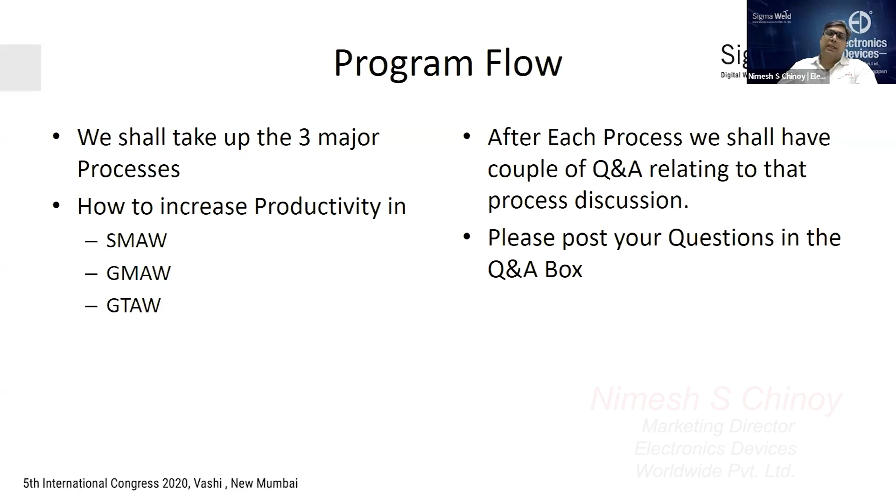Traditionally, the construction sector, when you look at it from the welding point of view, we are considering a lot of pre-engineered buildings and the technology is getting more and more modular, which means aluminum foam formwork, a lot of pre-engineered structures which are prefabricated in the shop, taken on site and quickly erected. Typically, arc welding, MIG welding is what is used for these applications by and large.

We will discuss how we can adapt to the newer technologies and migrate to the next process, and how it will help in terms of productivity.

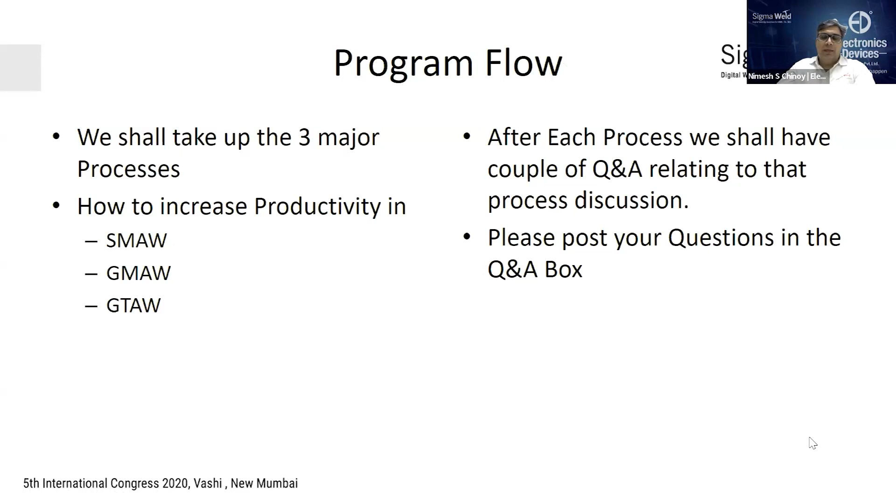Here's a small chart which shows a comparison between deposit rates for arc welding, which is at the bottom, about 400 grams to 5.5 kgs per hour. Then you have MIG-MAG, which is at 600 grams to a max of about 12 kgs. Then you have flux core, which is about 1 kg per hour to a range of about 15. And single wire submerged arc, which starts from 3 kgs per hour and can go up to 16 kgs per hour. Of course, there are variants in submerged arc which can take it further higher.

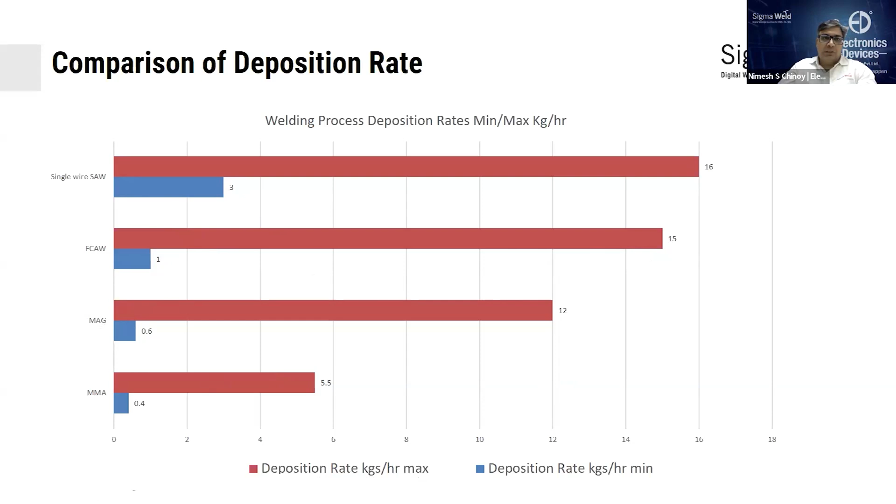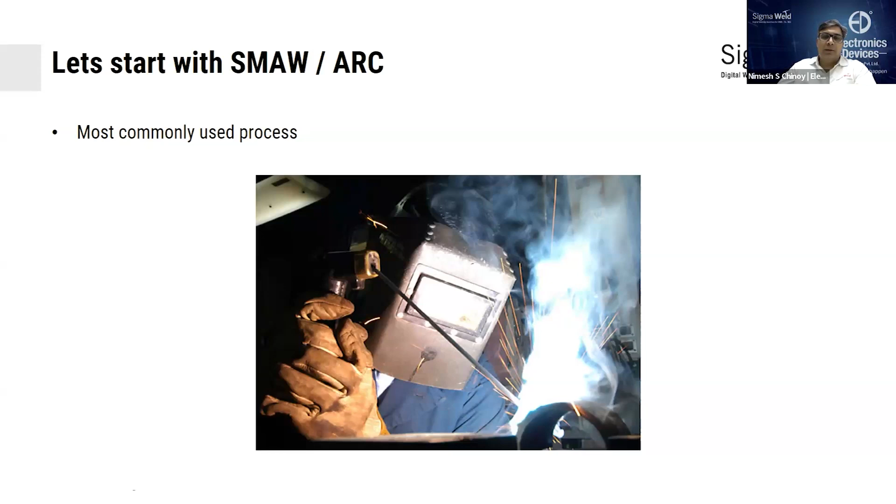But for the sake of our discussion, this will be good enough. Most commonly used process is arc welding, or SMAW. You would have seen this image at almost all sites. This is called arc welding, where an equipment is used along with an electrode to strike an arc. This process is man-dependent and usually cannot be automated.

Since the process is welder dependent, you need to remove the slag after each run of welding - chipping. There's a lot of spatter involved, which means grinding post welding as well. Of course, at the end of each consumable - that is a length of 300 millimeters, or maximum 1 meter in cases of shipyards - you need to change the consumable. There's a changeover time and a stub end loss, that is, the end part which the welder would not be able to fuse simply because it will be too hot. So that's something called a stub end loss which occurs.

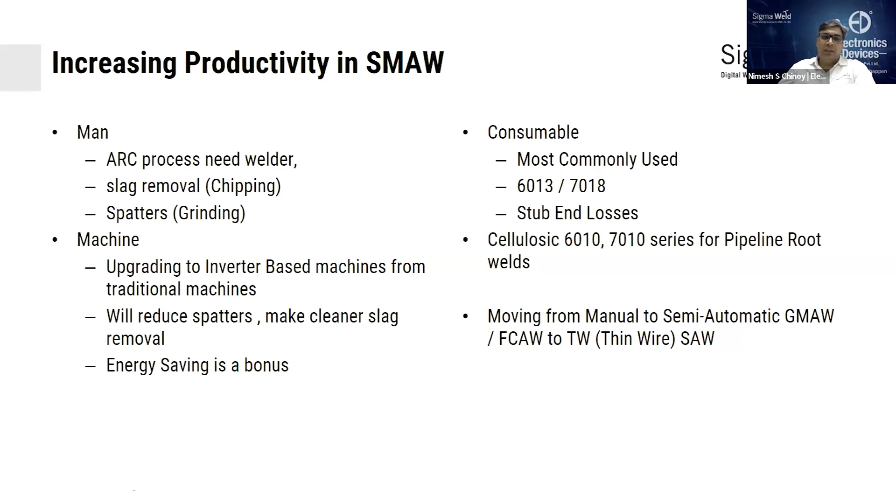How do you now migrate from this, or increase productivity in a process such as this? First, we can upgrade to inverter-based power sources from traditional transformer and thyristor power sources. This will help reduce spatter, make cleaner slag, and also help you save on energy. That means your energy cost goes down drastically.

When we move from arc welding to MIG or flux core welding, you can see the kind of productivity increase we can get. These are electrode types. If you look at 7018 welded in uphill position, you will get a deposit of about 0.65, that is 650 grams per hour. If you look at 6010 cellulosic electrode and downhill, 1 kg per hour. Then you look at low hydrogen deposit, 1.18.

The minute you start moving into flux core arc welding, you get 1.62. Move into semi-automatic flux core arc welding, that gives you about 1.78. If you mechanize it, that means put this onto a trolley - we will see all that later - you can get a deposit of about 2.43 kgs. And if you completely automate GMAW, that is gas metal arc welding, deposits can be as high as 4.41. And with dual torch or dual wire, we can reach up to 7.5 kgs per hour. So moving right from 0.65 to 7.5 is possible.

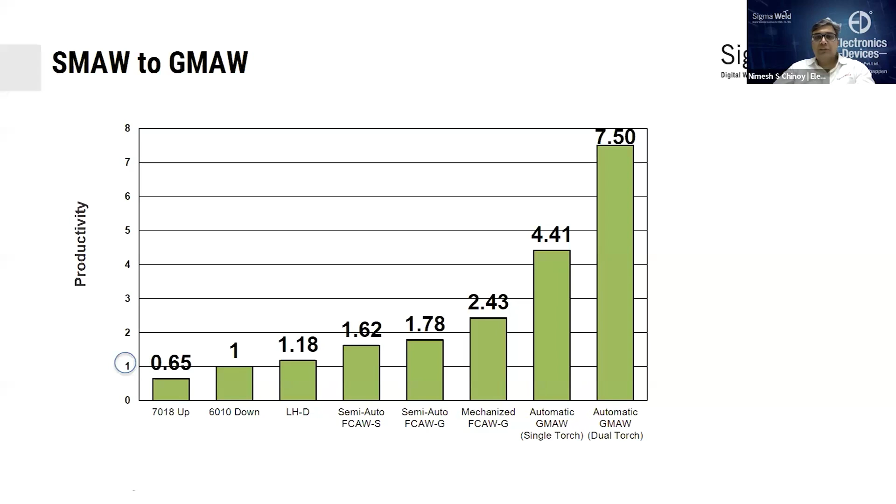Now, if you look at the advantages of moving from arc to flux core or GMAW - arc is a manual process, low investment cost, metal recovery is low. That means per kg of electrodes that you buy, your deposit rate is lesser. Stub end losses are high, no gas is required, which is a plus point. High speed in root passes is possible because you get higher mass deposited per square millimeter.

When you look at flux core arc welding, it can be manual or mechanized. Investment is higher compared to arc welding in terms of the capital cost of the power source. So a typical 400 ampere arc welding power source will cost you about 40,000. A typical flux core arc welding power source would cost you about 80,000. So initial investment is higher, but the metal recovery is even higher.

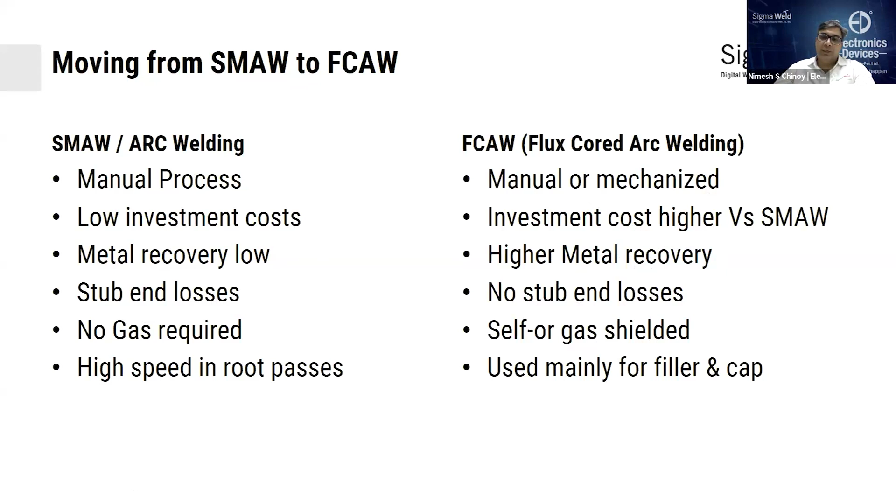So per kg that you spend, you recover more. Metal is deposited onto the job with no stub end losses. They come in 15 kg spools, and it can be self-shielded or gas shielded. It's mainly used for fill-up and capping runs, not for root runs.

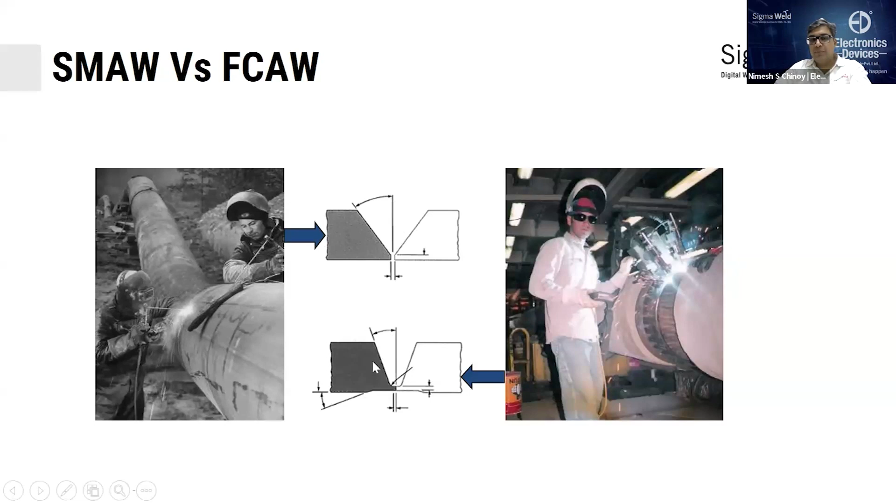However, if you mechanize it, that is, put it onto a trolley or an orbital track, you can reduce the gap, thereby putting lesser amount of material on it and having higher productivity. So this is what can be easily achieved.

Training of welder, you need to do if you want to move from arc to MIG, the same welder needs to be retrained. Basic MIG welding power source will be required. If you're doing FCAW or GMAW, you may need gas such as argon, CO2, or a mixture of argon and CO2. Semi-automatic, that means you can use tractor, trolleys, things like that. It can be easily automated. You can use single or twin torch per process.

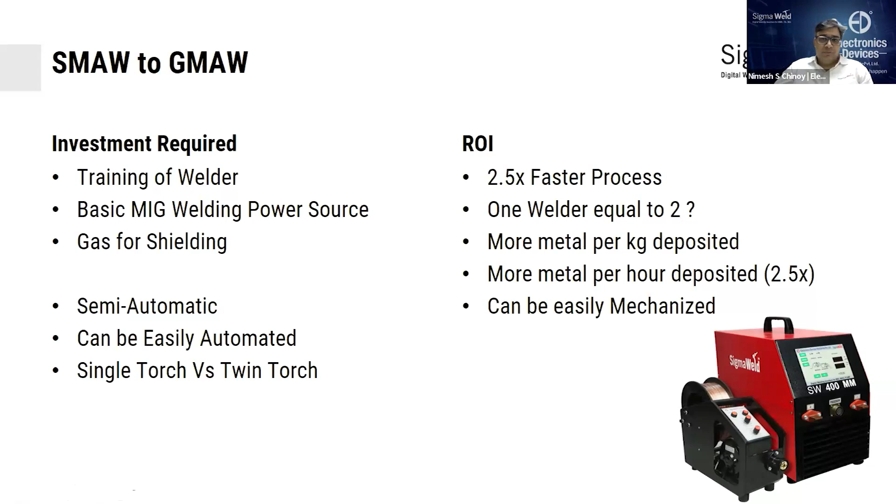What's the return on investment? If you move from arc to MIG, you can have 2.5 times faster process, so more productivity. One welder in place of 2 or 2.5, more metal per kg deposited, more metal per hour deposited, and you can easily mechanize the system.

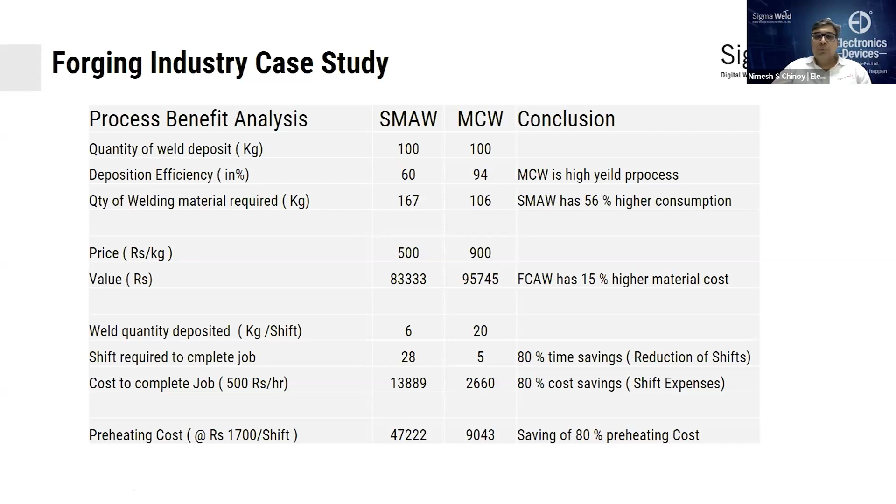For the forging industry, this was one of the case studies done. For every quantity of 100 kgs deposit, efficiency of shielded metal arc is only 60%, whereas metal cored wires was 94%. That means if you bought 100 kgs to deposit 60 kgs, you would only put in 60 kgs. Whereas in metal cored, if you bought 100 kgs, you would put in 94 kgs onto the job. So if you look at the saving on preheating costs, it's almost 80%, 80% saving on timing and 80% saving on costs. So it makes a lot of sense to move into the newer processes as soon as possible.

Industries where these are possible too: structural welding, prefab, pre-engineered fabrication, pipe to flange welding, forging repairs, and hard-facing applications.

Let me quickly take you to another process from which we can migrate from arc welding to thin wire submerged arc. Thin wire submerged arc makes a process possible for using between 5 to 15 millimeter thick plates. It uses smaller power sources like 600 amps, welds with solid wires of 1.2, 1.6, and 2 mm, and speeds are more than 7.5 times that of arc welding.

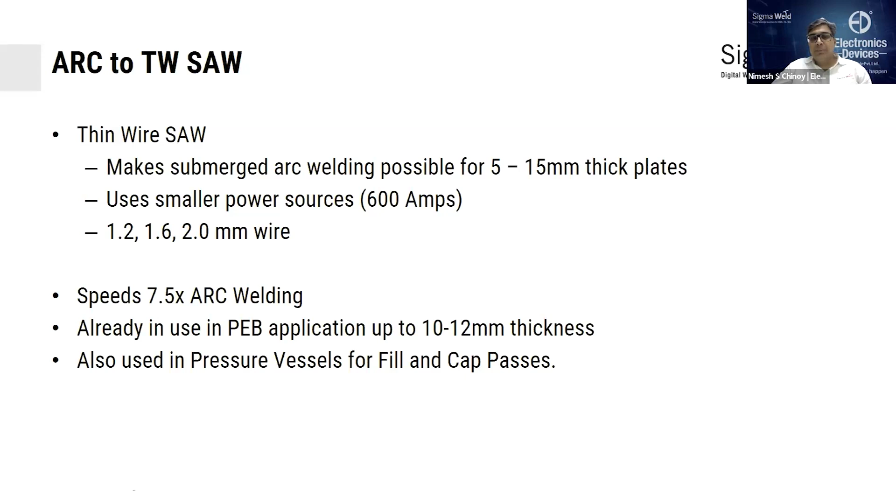It's already a standard usage in the PEB industry up to 10 to 12 mm thickness, and also for pressure vessels for fill and cap passes. Here's an example where a 5 or 6 mm thick vessel is being fabricated using thin wire SAW. This is a 1.2 mm wire, and the productivity is going up 7.5 times. Not to mention, when you use the submerged arc process, the weld quality also improves, and the deposit also improves.

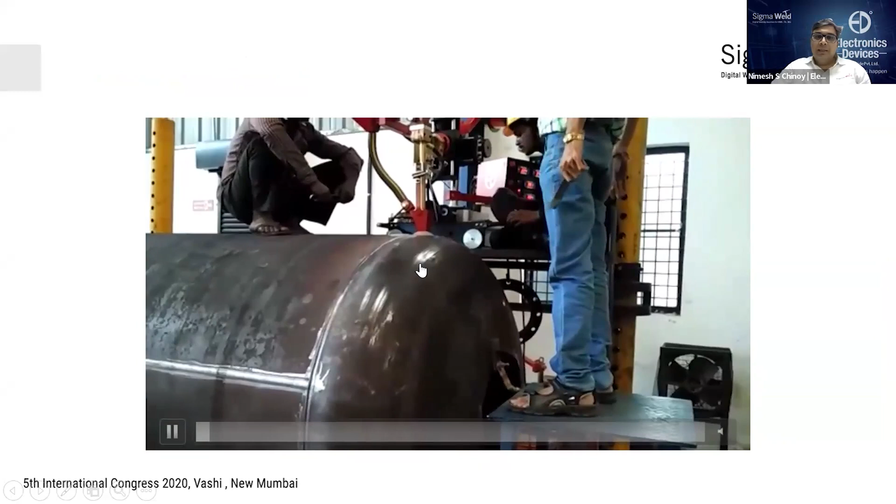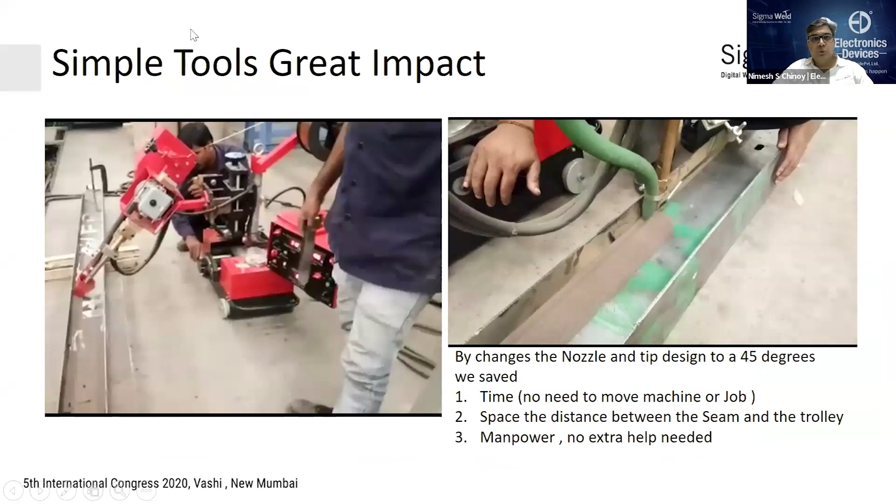Here's another example of just using simple tools to enhance the productivity. This is typically how you weld the beam - you would have to weld both these faces. So you would do one fillet this way, either turn the job around or turn the trolley around and do the welding on this side as well. This takes a lot of time and also a lot of effort on the welder's behalf.

However, if we change only the nozzle to a 45-degree nozzle, as you can see here, you could weld both sides from the same trolley only by flipping the torch around 180 degrees. So you are welding this, turn it 180 degrees, and you start welding on this side.

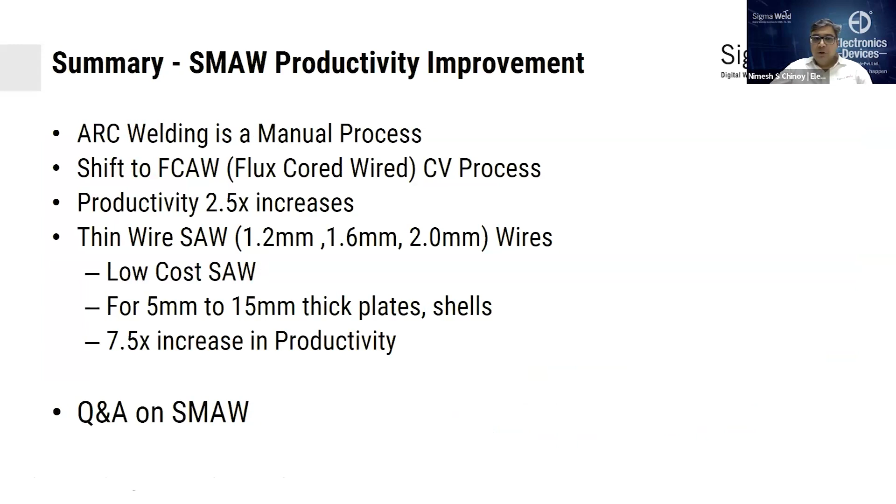So the space saving is there, time saving is there, and no extra help required. Productivity improves. So in summary, from arc welding we can move to flux core, which is a constant voltage process, to improve productivity 2.5 times, or to thin wire submerged arc, which can help increase productivity to almost 7.5 times.

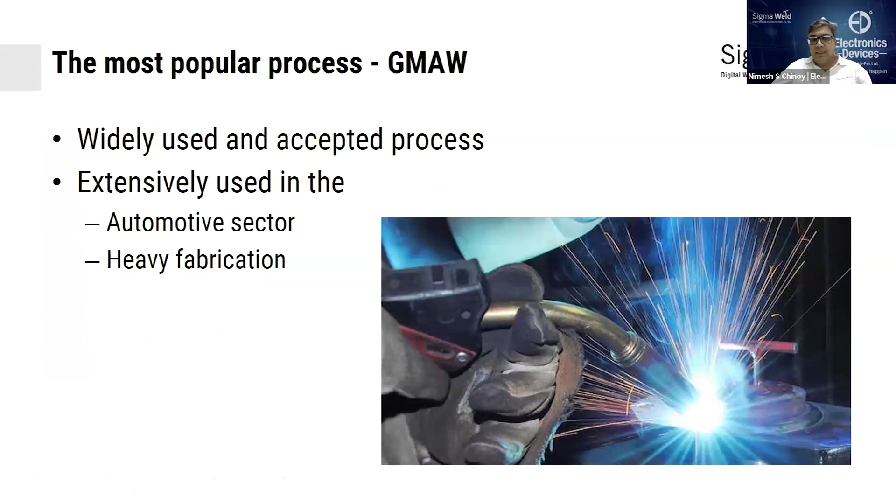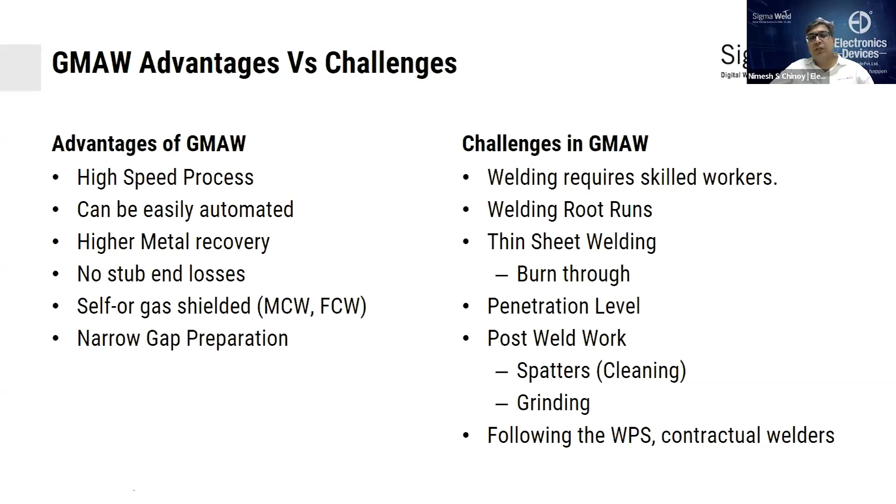Quickly diving into GMAW processes - if you look at GMAW, it's another widely accepted process, extensively used in heavy fabrication and automotive sectors. It's a very high speed process, can be easily automated, higher metal recovery, no stub end losses. You can use self shielded or gas shielded wires, and narrow gap preparation is possible.

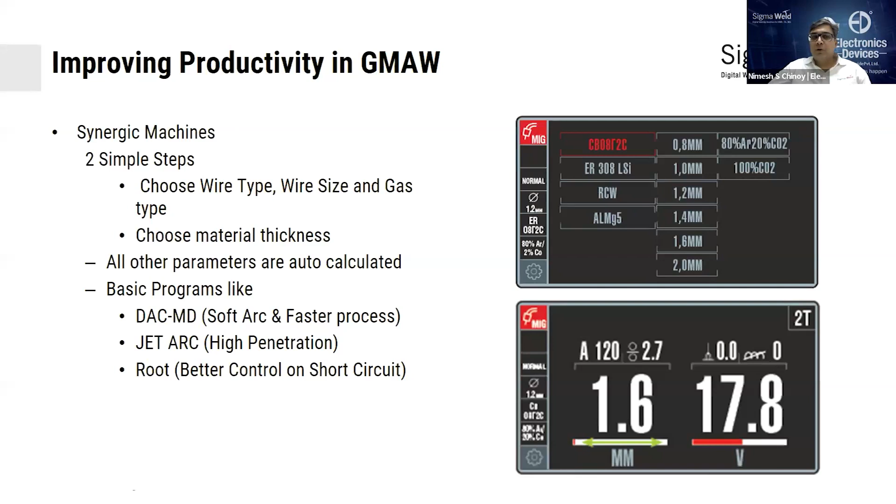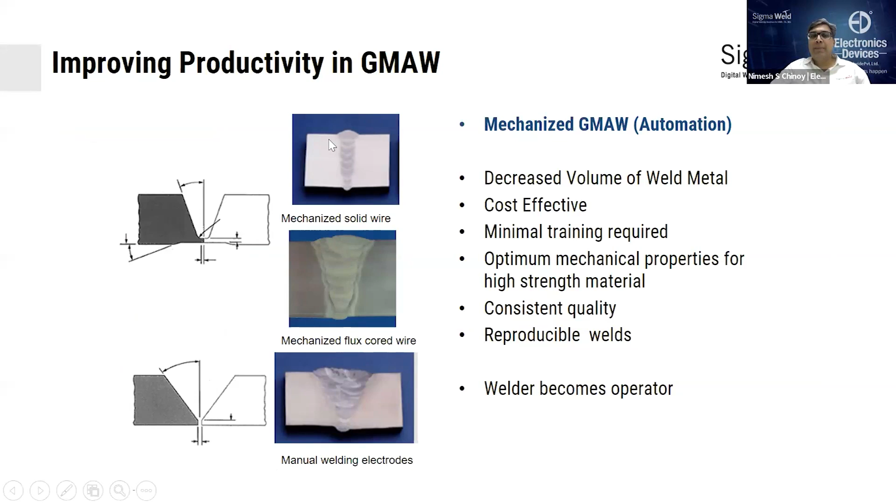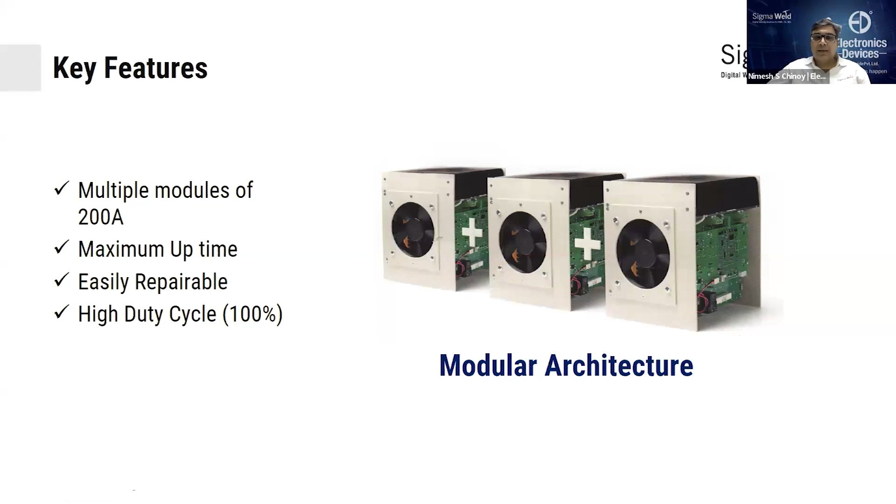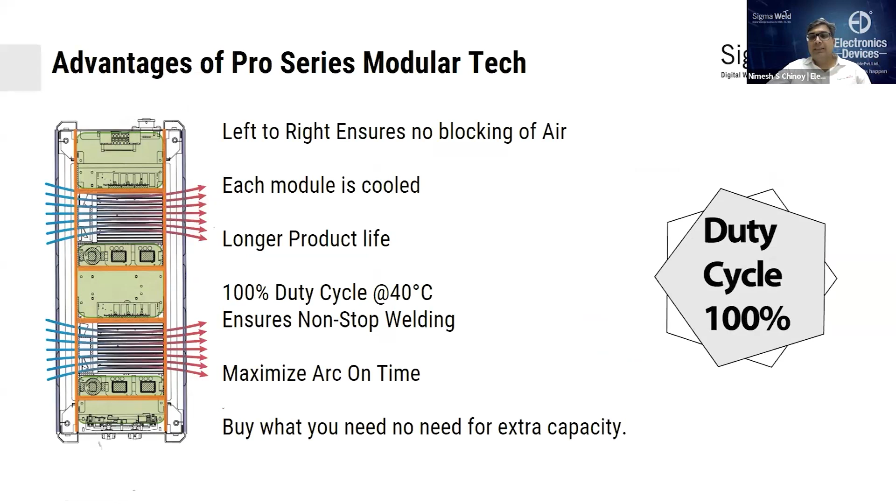Because they are modular, the airflow is left to right, not front to back. You have very quick cooling, and therefore you can have 100% duty cycle, which means more arcing time and less stoppage. These are highly efficient power sources, up to 96% efficiency, therefore very low power consumption.

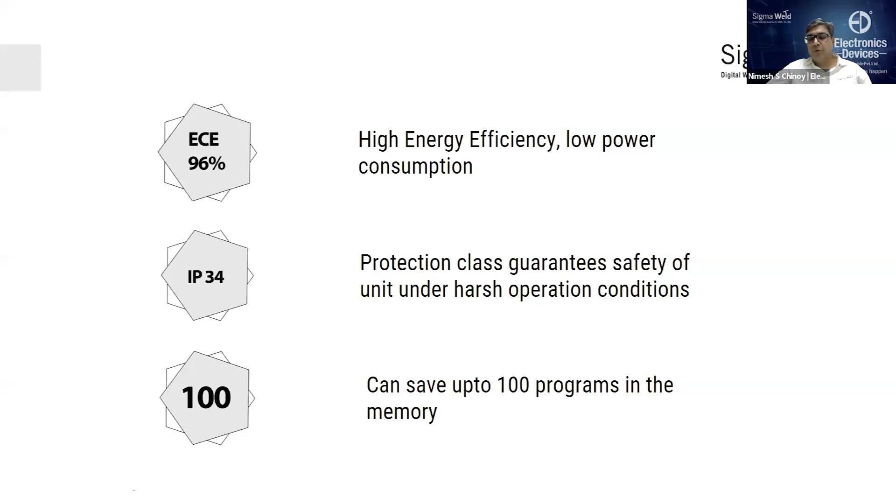They come in IP34, so it's very easy to use on construction sites. Can save up to 100 programs in the memory that can be recalled comfortably. They're digital in nature, with very simple tools which help operators quickly change parameters without going to the power source itself.

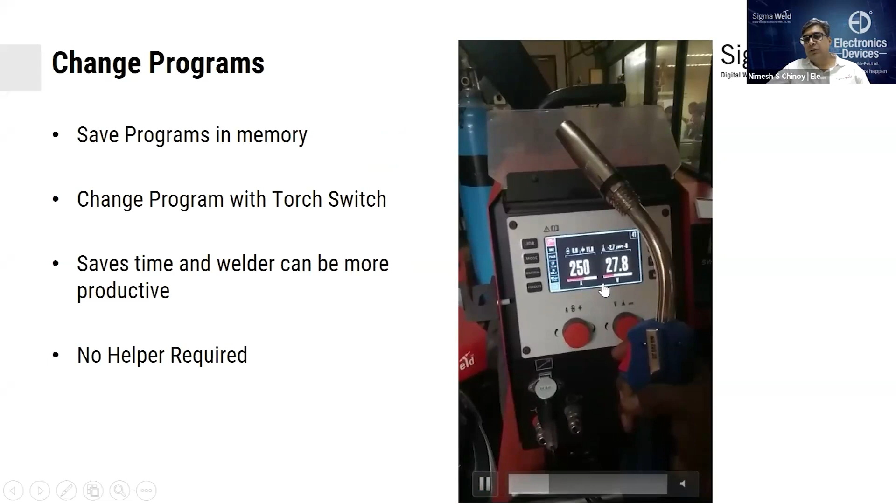So operators are double tapping the torch to change the program. If you look at the screen, you can always recall the first, go back, go forward, only using the torch itself. This saves the operator from going back to the power source to change the parameters.

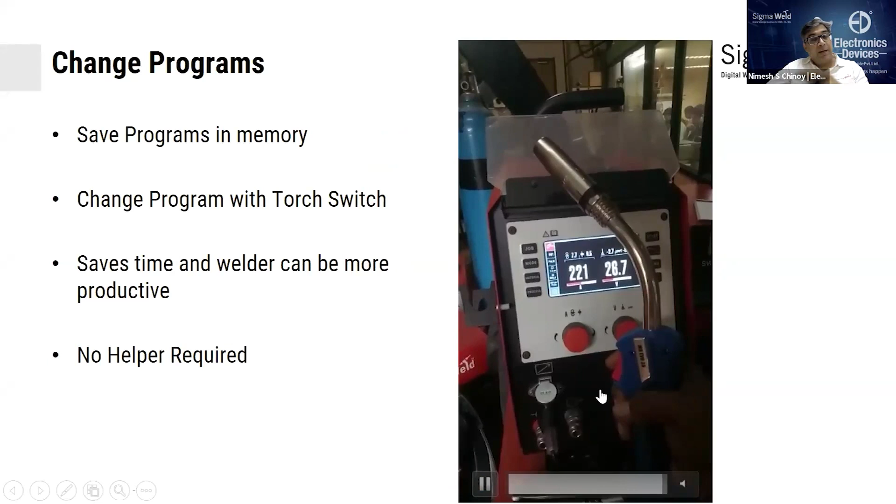Very easy. You can also have RFID protections where your program is stored in RFID. When you swipe it, the welder can only access the parameters given to them, and it locks the rest of the parameters.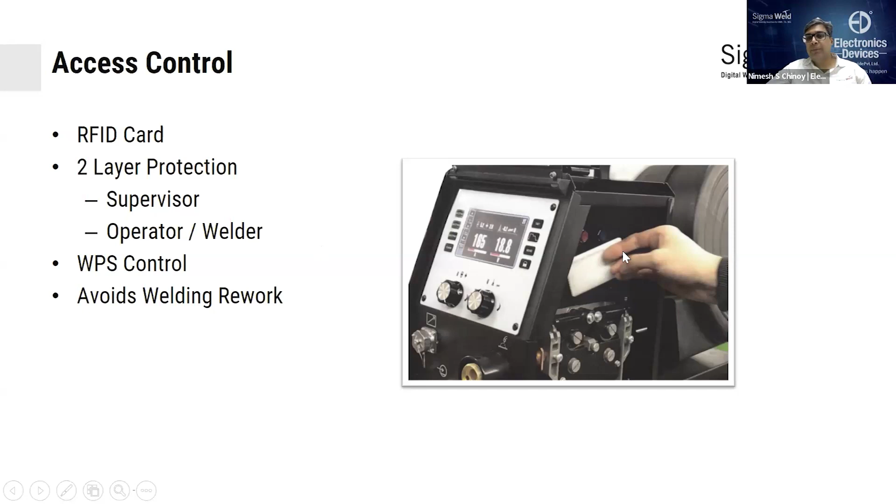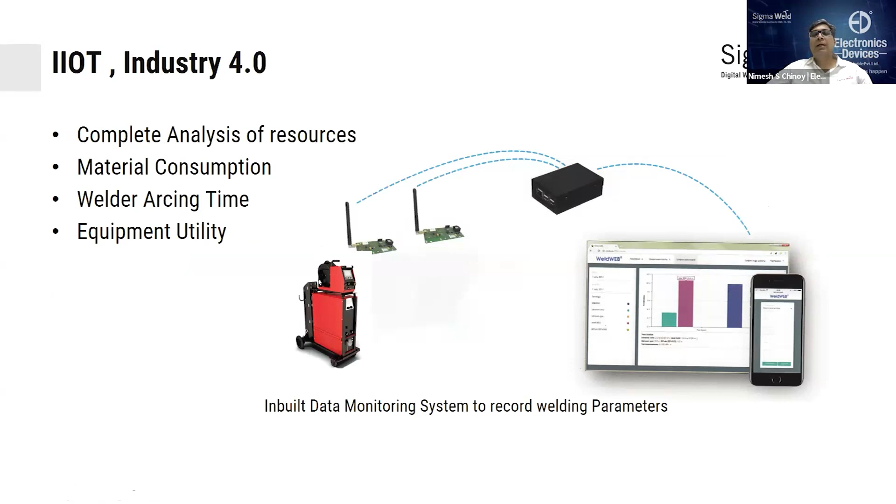Obviously, IoT is the name of the thing right now. You can capture all the data, send it over a weld web, and secured data transfer can happen over cloud or on your local server, and you can monitor real-time welding and analysis of the operator's performance.

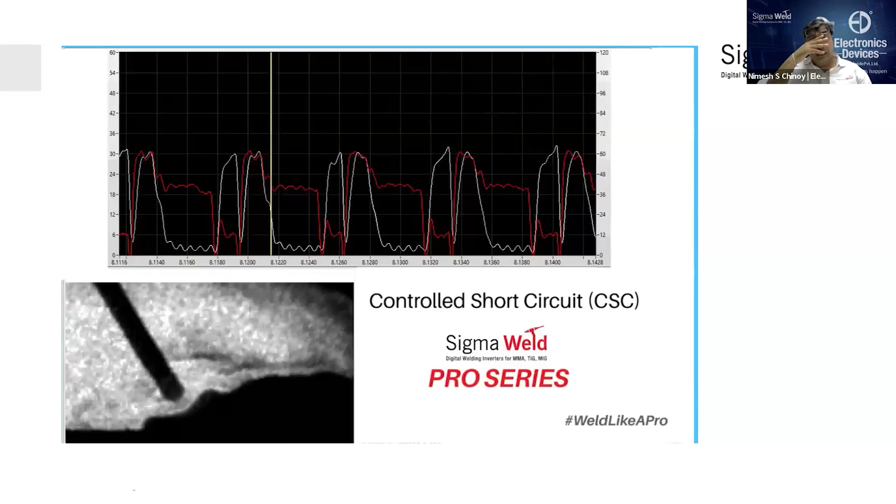These are advanced power sources. They come with very high control of waveform, which allows you to have much better pool control, meaning you can weld root passes directly, requiring lesser time for the overall process.

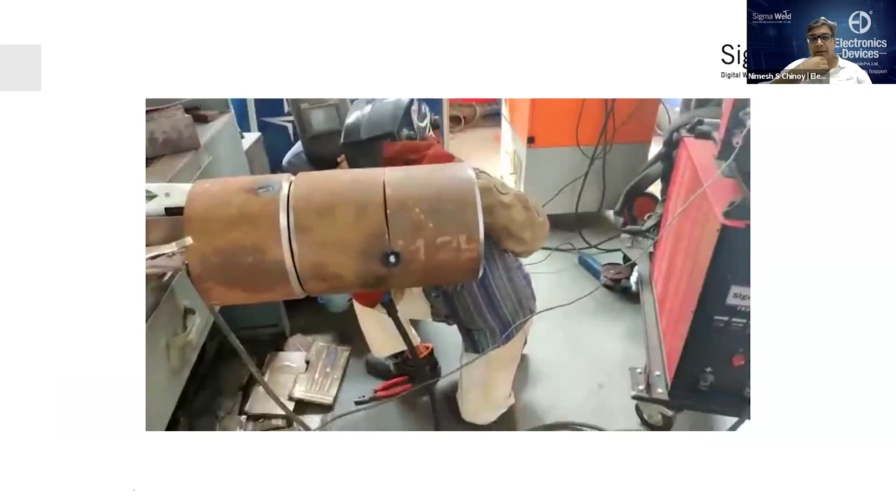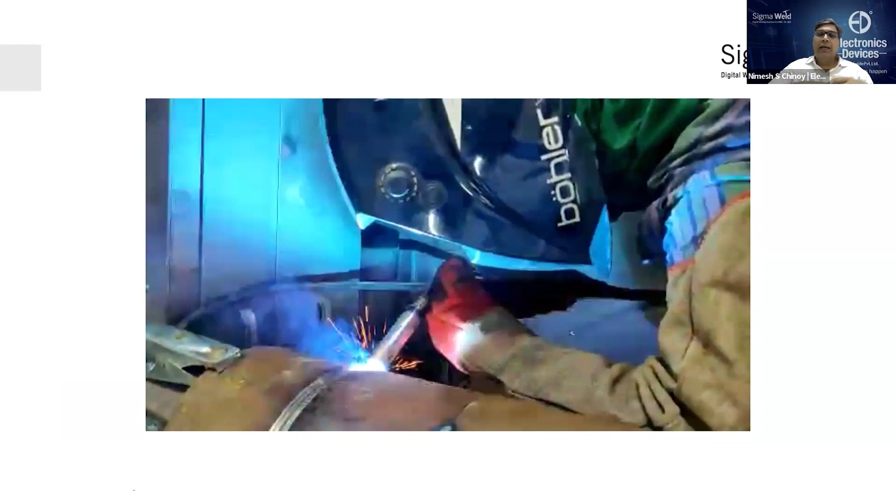So here is a welder welding with the Pro Series root gap directly with the solid wire MIG process. This saves a lot of time and allows the welder much more control on the weld pool, giving much higher productivity. Many more programs are available in these which help achieve this.

With this, I would like to stop the session because we'll move into TIG. But for the construction industry, I think ARC, MIG, and Submerged Arc are the processes which help speed up productivity and are most used. So with this, I would like to conclude my presentation.